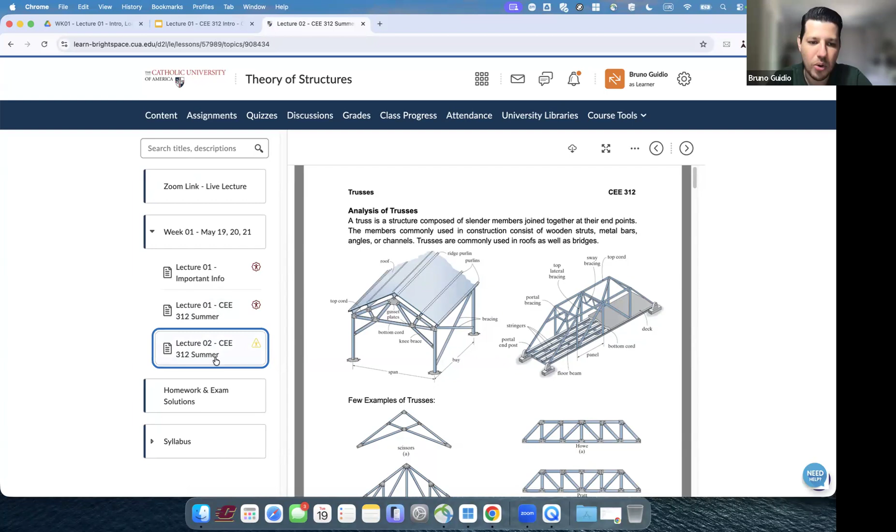Week one, lecture one—that's what I'll spend time on, and that's what I'm about to start now. I've already posted lecture two, which will be on trusses for tomorrow, if you have time. Lecture three will probably be SAP2000, so that's going to be software—I don't have anything prepared, I'll just go into the software and maybe create a problem and post it later. Here you'll also find the homeworks and the exam.

If you need it, the Zoom link is always here for you, and the syllabus is here too. If I need to update anything, it'll be posted there.

Before going to the syllabus—assignments, okay, I already posted assignment one right here, you should be able to visualize it. Grades—you can see your grades there, and that's also where exams and quizzes will be listed. I'll probably make a fake quiz so you know what I mean about quizzes. Discussions—feel free to post anything you'd like to discuss or anything interesting for us to see. And grades, that's pretty much it.

Let me go to content and to the syllabus. Okay, theory of structures—what are we going to learn in this class? We're going to learn principles and methods to analyze structures. In other institutions, this class is called structural analysis, so we're going to analyze structures.

We did something similar, or very similar, in statics, where we analyzed trusses, beams, and shear-moment diagrams. We're going to do this here as well, so sometimes it'll feel the same, but it is not—we're going to go further. We'll analyze beams and trusses, but also frames, which is something we didn't cover in statics.

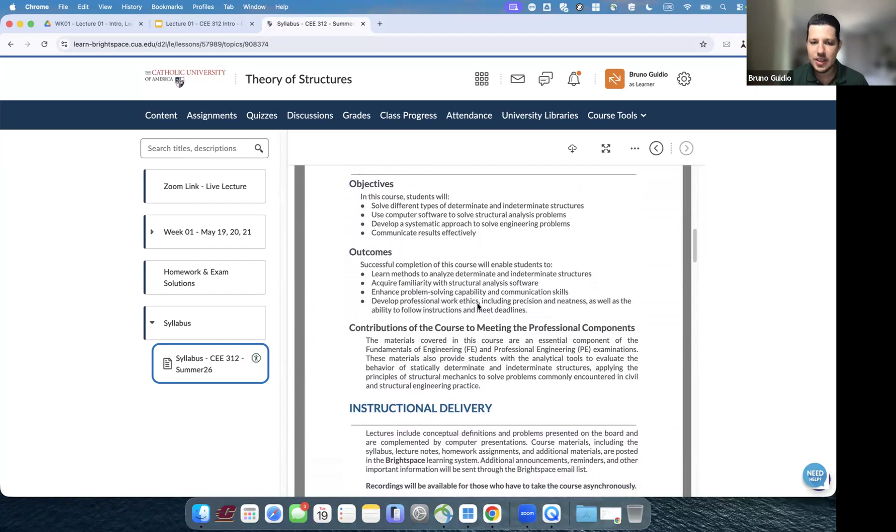Books, structural analysis, as I said. Calculator, by now everybody has one, you're going to use it a lot. Okay, SAP 2000.

How are we going to access it? First, if the syllabus is open, click here, leave it open if possible. First, the remote access request form, click here, you'll see this email, just record and submit, that's it.

Then the tech service will allow you to access SAP 2000. If you're on a computer right now, please go ahead and do it.

Later, you're going to follow these steps. You have to go to vpn.cua.edu, come here, probably student login, get your ID here.

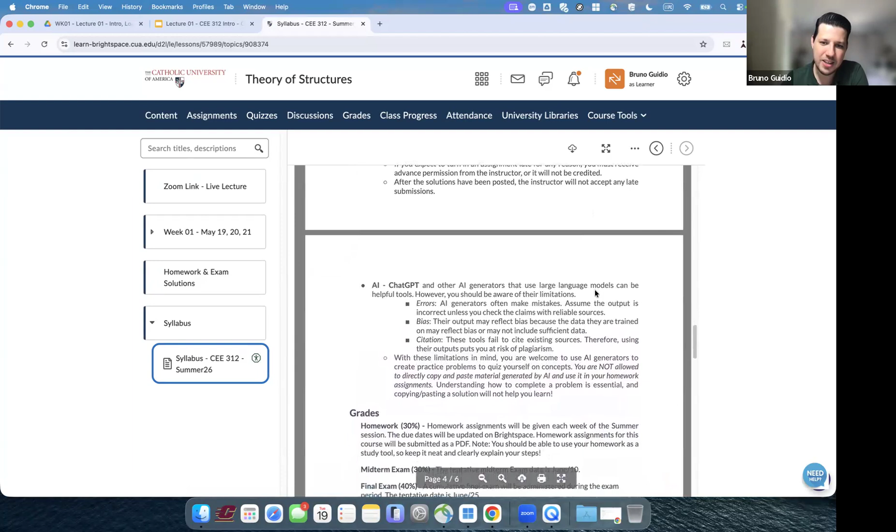AI, guys, I already told you about AI, use it in your favor, I'm not against it, use it to create new problems. But pay attention to whatever it gives you, let's see if AI can solve the homework.

Yeah, probably AI can do a decent job, but you have to know the stuff in order to find if the AI is doing a good job or not.

Engineers are using AI, but we still need engineers to review plans, to review drawings, to review assumptions. We still need your critical thinking, so you need to be able to read it and see if there are errors or not. Please, if you're using AI, make sure you review it and understand it.

Sometimes you're going to ask AI to create a problem for a topic, and maybe AI is going to get something wrong in the statement, and you're going to be able to judge it. That's what I want to see, just seeing if it is all good with AI.

I didn't do it this time, but probably I'm going to do it for next fall. Last fall I took a statics problem and put it in different AIs, and I got three different answers, none of them 100% correct. Of course, this was a year ago. AI is much better right now, and every single day it's much better.

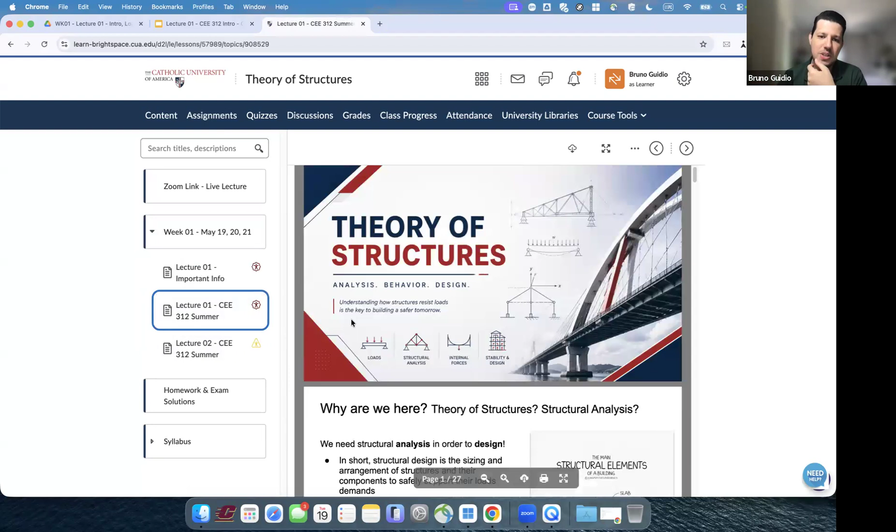Okay, let me share my screen once again, and this time I'll use my iPad. I didn't mention it, but I think most of you know already: for example, lecture number one is already here as a presentation, but I'm going to use my iPad to make some notations. But for lecture two, that's pretty much what I'm going to do most of the time—we have the lecture, we have a space to solve problems, I'm going to use the iPad, and then after class I'm going to post the completed PDF for you as well. So for those who never took my class before.

So those are the things I'm going to start discussing and keep in mind for the structures - that's what we're gonna do in this class. So why are we here? Theory of structure, structure analysis - we need structure analysis in order to design.

In short, structure designing is the sizing and arrangement of structures and the components to safely support the loads. This is design - we're gonna size and arrange the components of the building. What are those components? Well, we have slab, right here, columns, we have beams, we have foundations. It's pretty much what we have, and we have how we size these, how we arrange those structures.

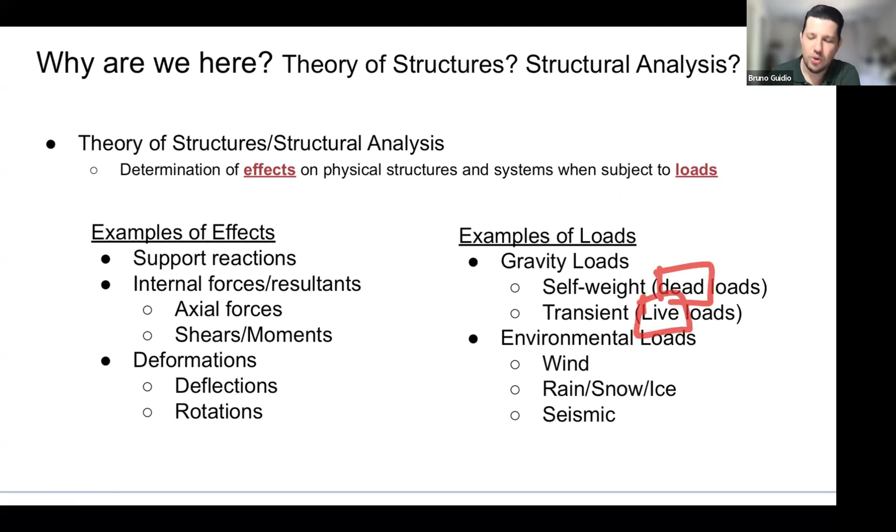And what type of loads do we have to cause those effects? We have some examples here - gravity loads, which is dead loads and live loads. Dead loads are the self weight of the structure - all these stones, concrete, the steel, this glass, the window glass, the roof - all of that load.

And what are the live loads? Well, live loads - people. What else? Chairs, tables, computers - live loads, things that can move. We design or analyze the structure by considering some dead load and live load - how many people are going to be here in a space?

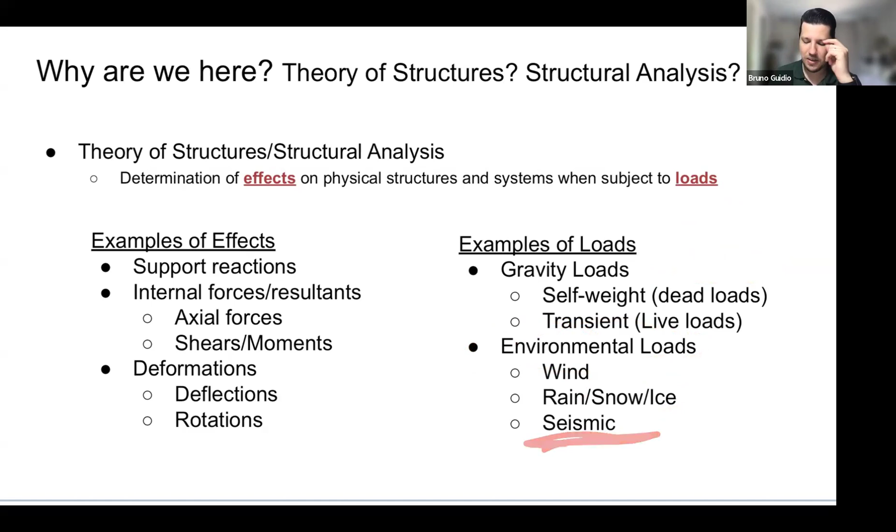But also we have environmental loads, which is wind, rain, snow, ice, seismic. We don't have seismic that much, though people say a few years ago we had seismic here in DC, but we have wind, rain, snow. So in order to design this column here, we need to determine how much snow is going to be here.

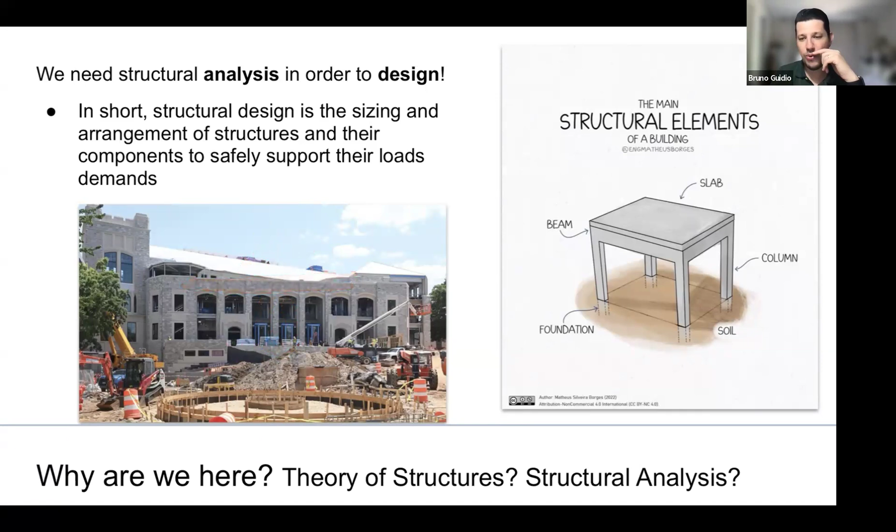How about the rain load? And we have snow, but sometimes we just have some ice there. Ice is going to stay there for a few weeks. And all of those loads are going to cause reactions, internal force, deflections.

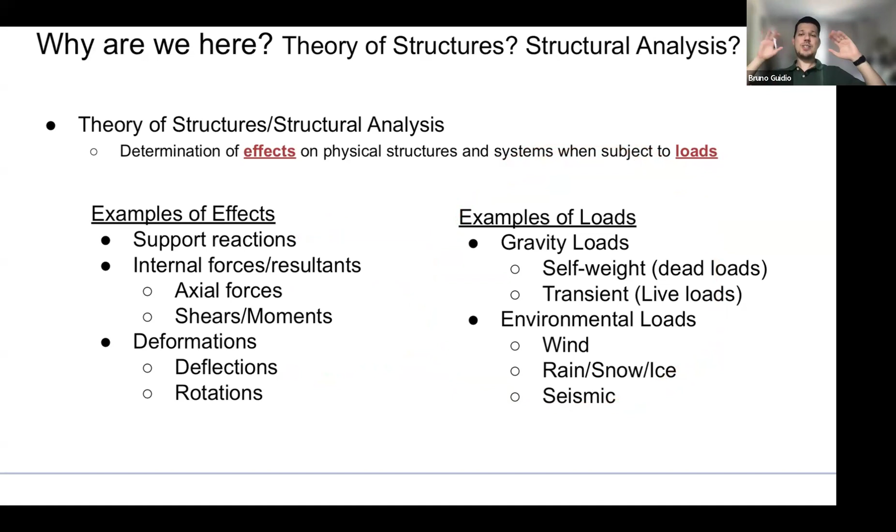So see how the structures behave - that's what I want you to see in this class, how they are behaving. Let's take a look here. Structure loads, as I said, we have all of those - various loads imposed on the structure. So the first thing that we need to understand, load is very important, very important.

You can get a post-it and say study about load path. Load path, this is huge. We need to visualize how loads are transmitted between and among the structure. It helps engineers sometimes eliminate unnecessary members, strengthen others, or identify potential problems. So once we understand how the load path goes in our structure, we start to understand how we design the structures.

We start understanding, hey, is this column here really necessary? Can I remove this column and distribute this load to other elements, and how is this going to be? Maybe someday your job is going to be the following: the client calls you and says, hey, I bought this house, but there's this column in the garage, and I really want to remove it because I want to fit another car. Am I losing this space because there's a column right there? And what do you do?

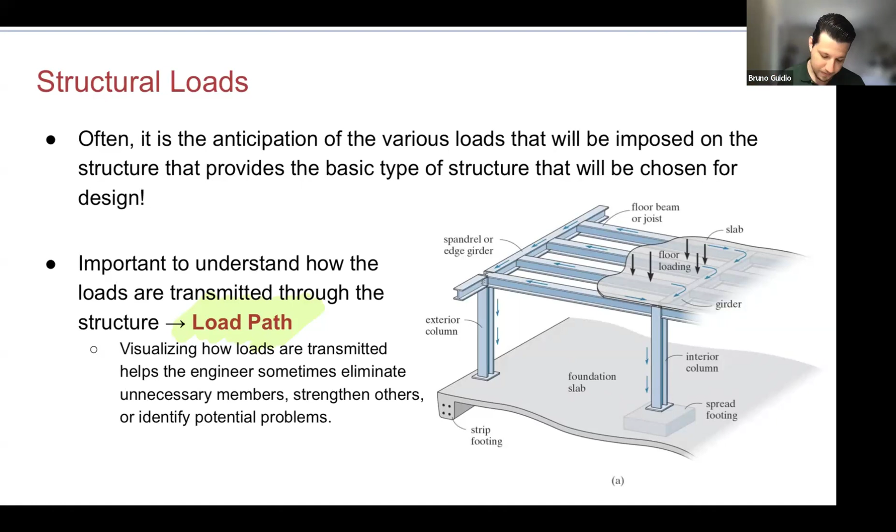Okay, so this is what I want you guys to start visualizing. This is very important, especially if you are going to do a structures concentration. But of course, everybody needs to have this understanding whether you're in structures or not, so that's why it's a required class for everybody. Now, we talked a little bit about structure loads - sorry, the load path.

Now, Bruno, how do we know the loads that are going to be applied in this structure? Well, remember that I talked about self-weight - I'm going to get there. We can calculate self-weight, we have the cross-section of a concrete beam, you know the specific weight of concrete, we can get there. But what about the other loads? Okay, we have some building codes, some design codes to guide us about the loads in structures.

For example, one big one is this: the minimum design loads for buildings and other structures. This is from the ASCE - ASCE 7. So this is a document, ASCE 7, the minimum design loads for buildings and other structures. This document talks about all the loads, even the self-weight loads, the dead loads, but it's going to give you the values for live loads, because if you're talking about a house, the amount of people in the house is different than in a classroom. Do you guys agree? So the live loads that I'm going to consider are different.

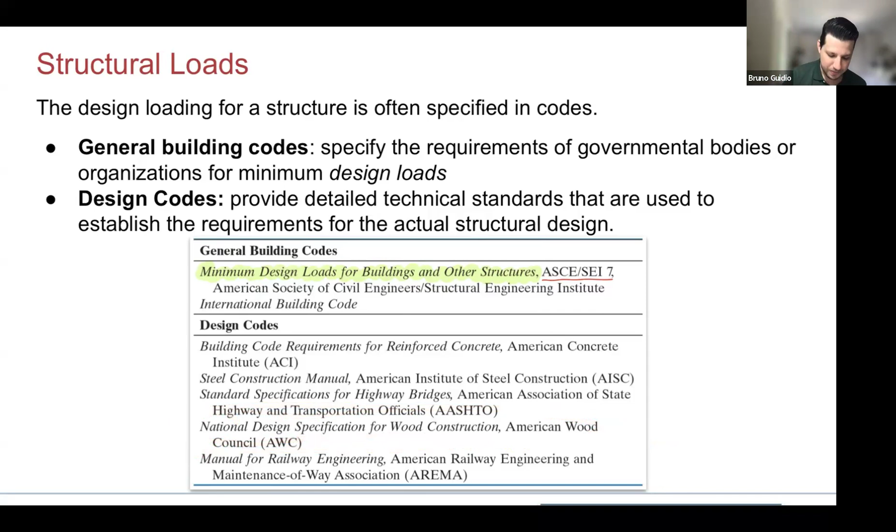Now let's talk a little about each of those loads. As I said, here I'm just going to touch on them briefly. In the homework you have a question regarding loads as well, but I go much deeper in my structural loads class next spring. Still, this is good understanding everyone should have, which is why I'm touching on it here.

Dead load: most of the time we have the specific weight for the materials. The dead loads are the weight of the many structural members that are permanently attached to the structure. For a building, that includes the weight of columns, beams, girders, floor slabs, roofing, walls, windows, plumbing, electrical fixtures, and any other attachments—all of that goes to dead loads.

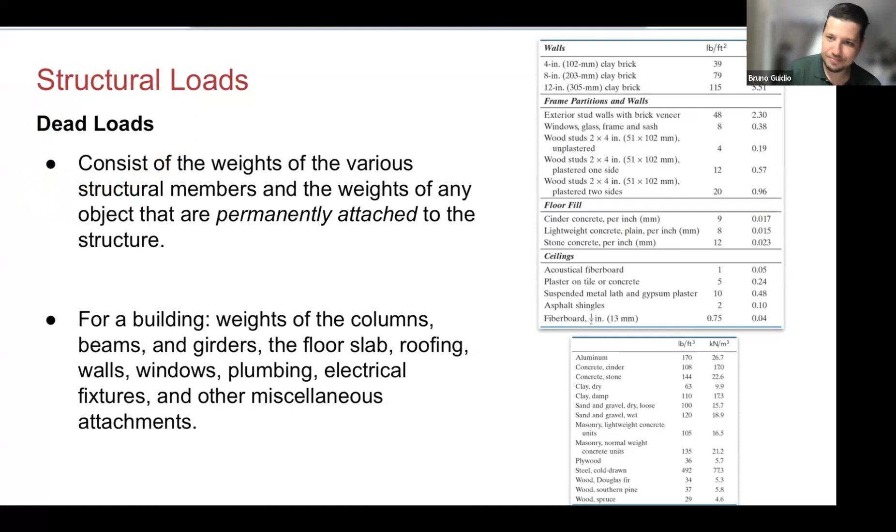So for example, right here, can I zoom here? I can zoom here, you guys can see.

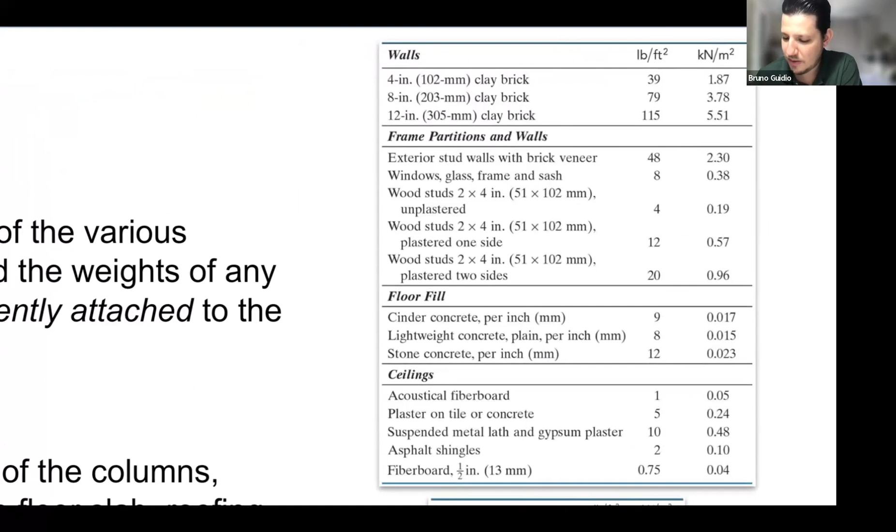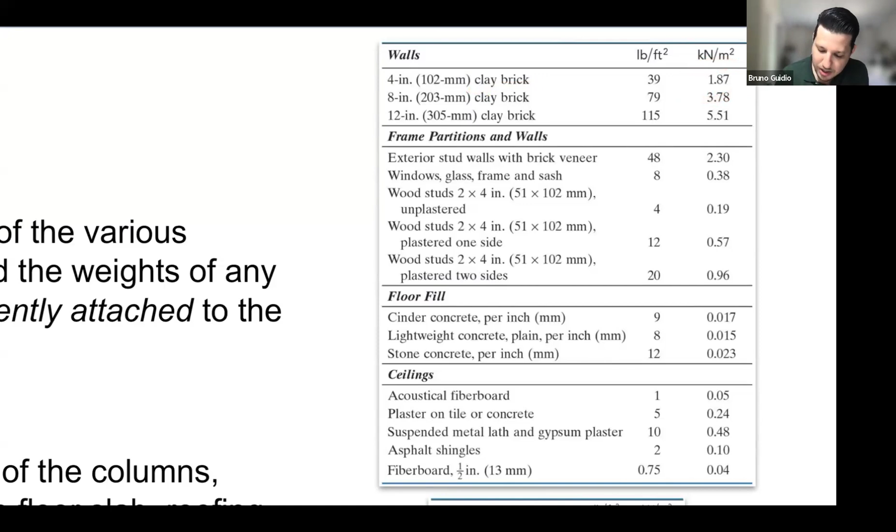Walls. What is the specific weight for a 4-inch clay brick? If the wall is 4-inch, the width of the wall, I have 1.87 kilonewton per square meter. How many square meters of wall do I have? Multiply, I have the weight in kilonewtons.

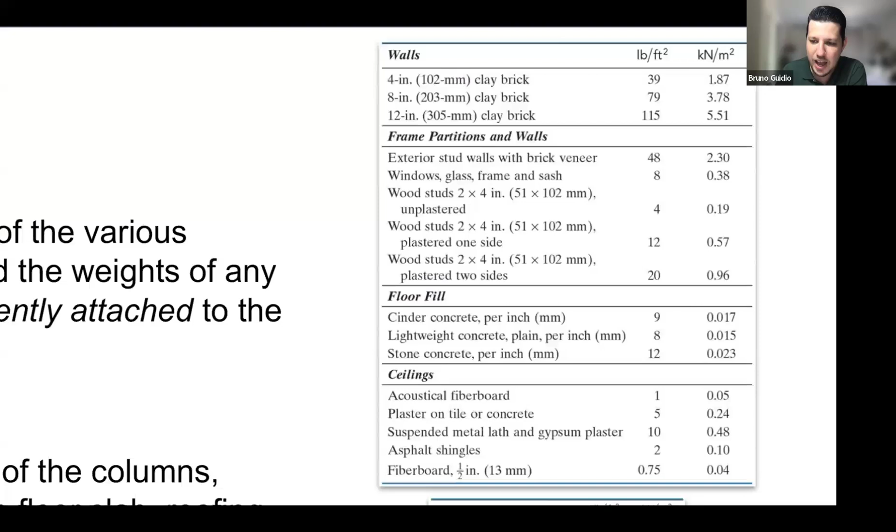Or pounds. Let's talk about pounds for 12-inch clay brick, 115 pounds per square foot. How many square foot of wall do I have in that specific area? 25. So 25 times 115 is going to give me a number of pounds. That's going to be the weight of the wall.

And that wall framing, remember using framing, I'm using 2x4s, with plaster on two sides, unplastered, just the 2x4. I have windows, exterior stud walls with brick veneer. Most of the time we have specific weights.

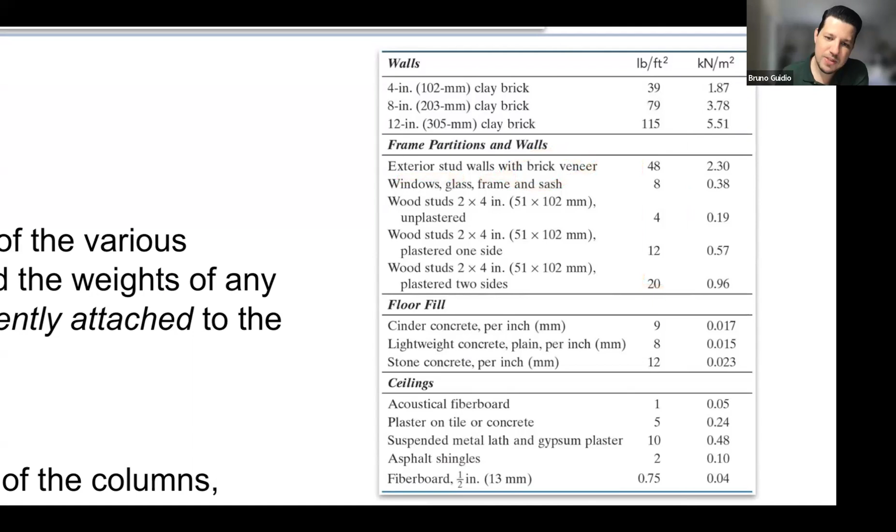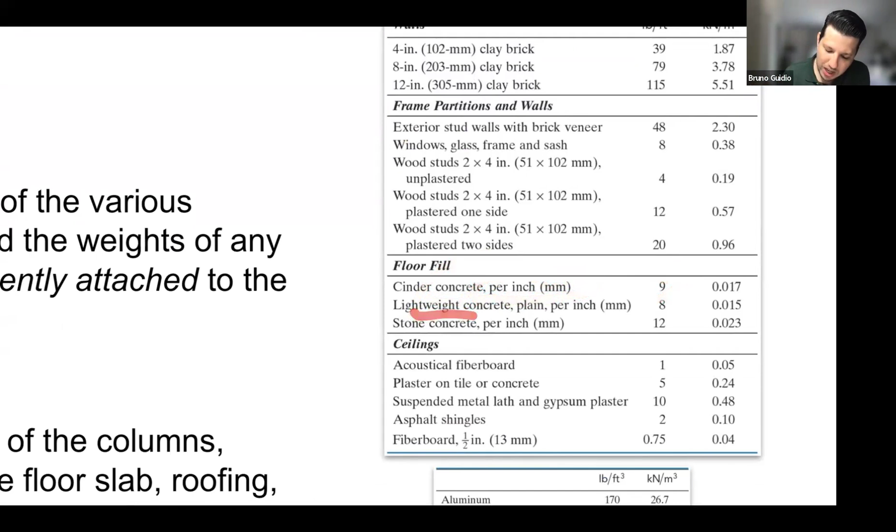The floor fill, concrete per millimeter or per inch of weight of height of concrete. We have 9 pounds, lightweight concrete, stone concrete, ceilings. What am I gonna put in the ceilings? Right here I have specific weight. Also, I'm gonna give an example in a moment.

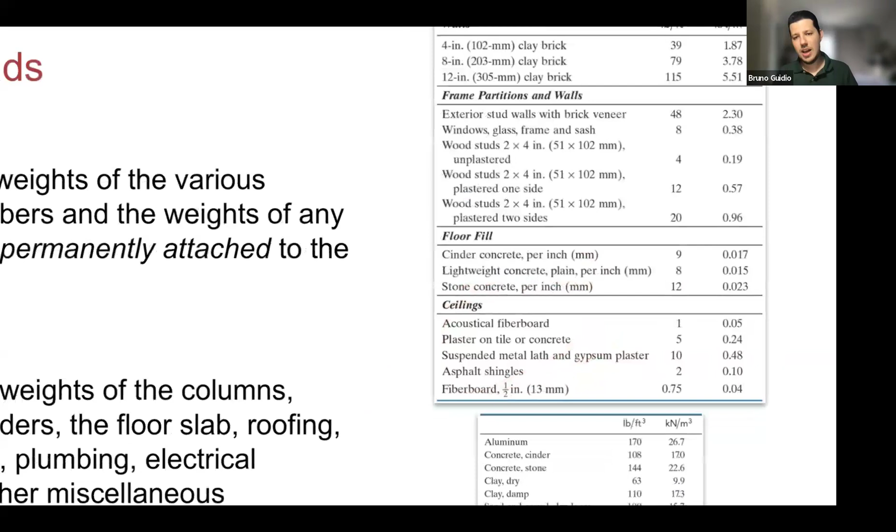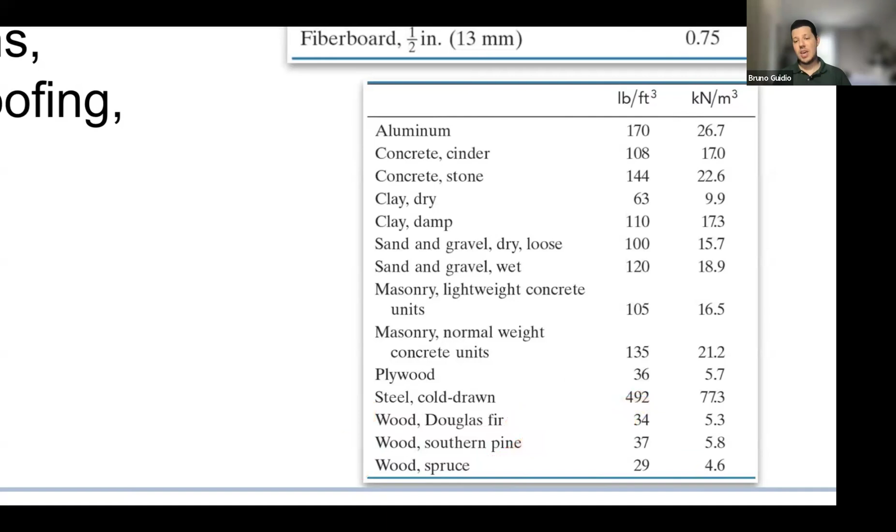We also have here for some materials: aluminum, concrete, clay, sand, masonry, plywood. If you're talking about steel, wood, we have different types or species of wood: Douglas fir, southern pine, and spruce. Different weights. With wood, in my design with you, which species of wood am I gonna specify, because there are different weights, different considerations.

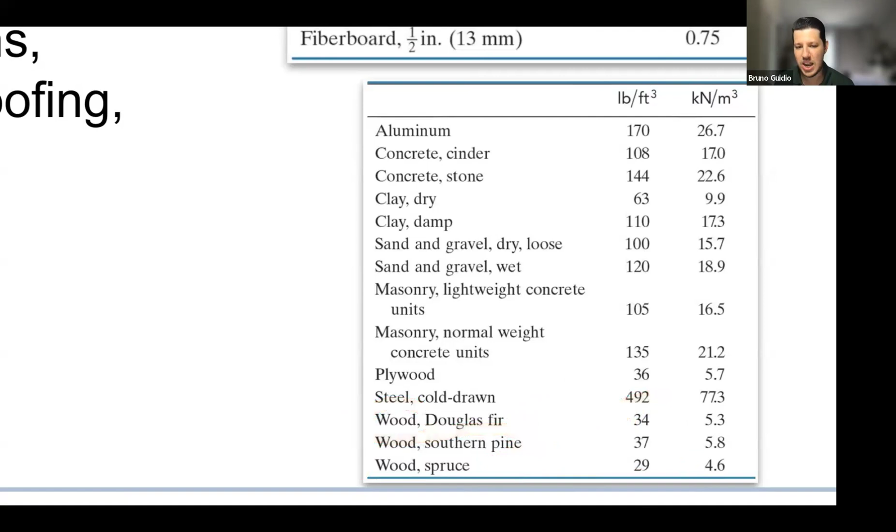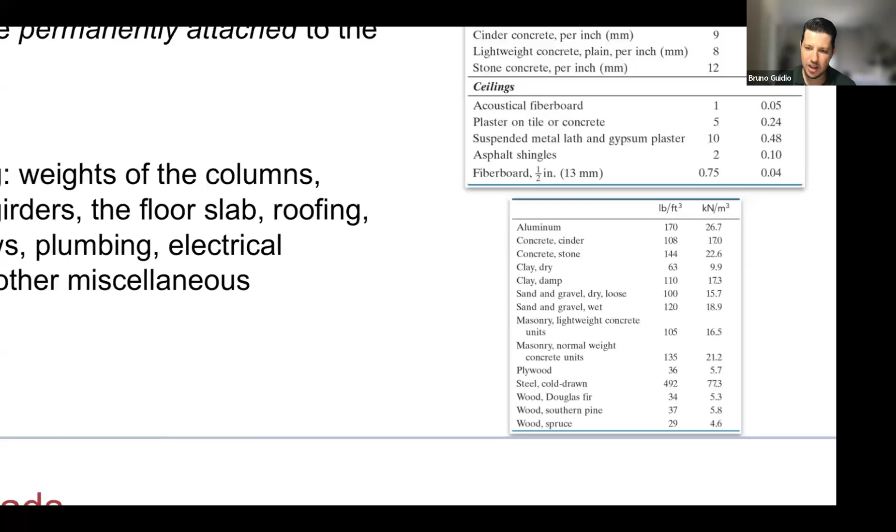Depending where you are in the United States, you're gonna find some of them. Most of them you're gonna find Douglas fir, but if you go to the south, you're gonna find southern pine. So those are the dead loads.

Let me give an example. Did I solve this one here? Yeah, I solved it already, so I don't need to solve it right now. So dead loads, example.

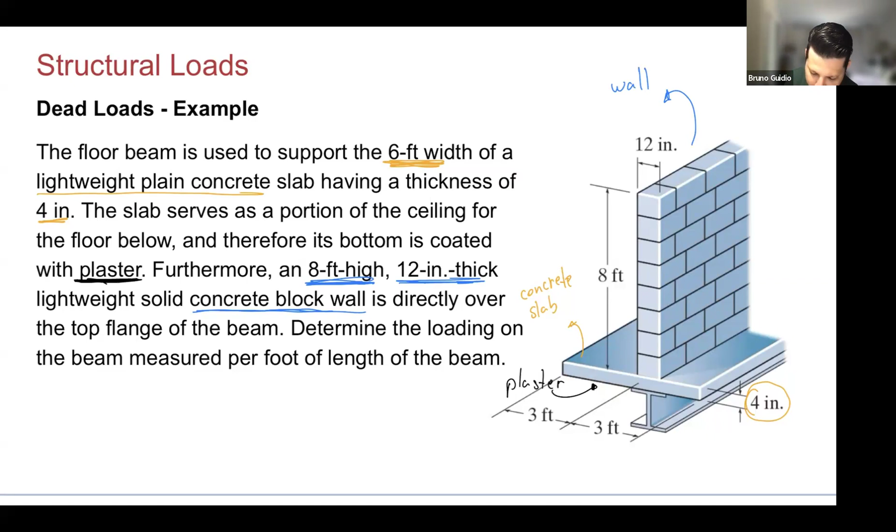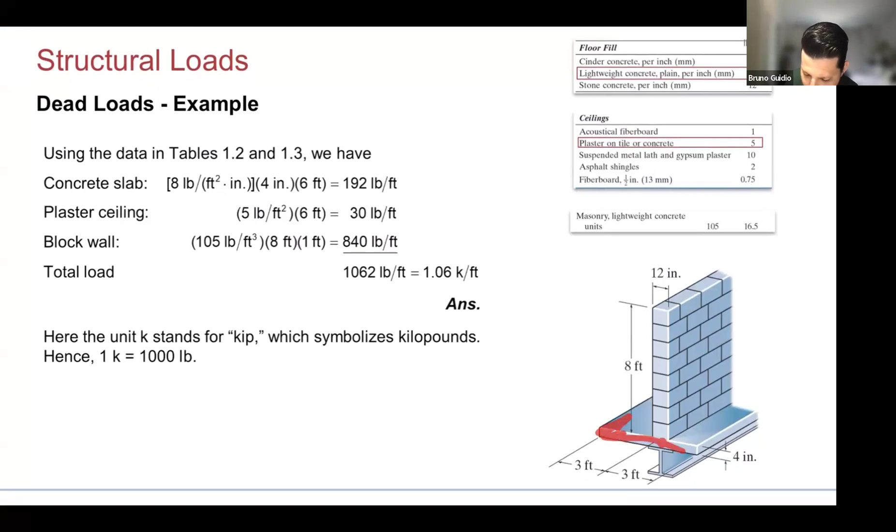So how do I do that? Using those tables that I showed, as I said, this is a very high-paced class, so I'm gonna just go straight to the point here. First of all, what do we have here? We talk about the concrete slab. I go there in the table that I showed you for floor fill.

I have lightweight concrete, 8 pounds per square foot per inch. I have 4 inches and I have 6 foot of length here. Multiply all of that, I will have 192 pounds per foot.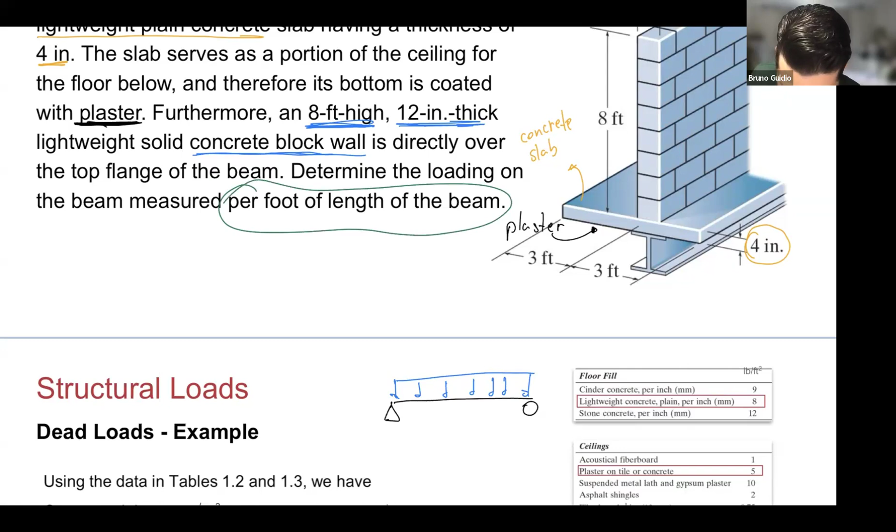Because we're talking about beams, we're talking about the distributed load. That's what I mean by measure per foot of length, it's a distributed load right here. So that's why I'm getting 192 pounds per foot. Per foot of this beam, I have 192 pounds.

Now, plaster as well, ceiling, I go there, found here, 5 pounds per square foot. I have 6 foot, 30 pounds per foot. Wall, right here, masonry is 105. 105 times 8 times 1 foot, because 12 inches is 1 foot, I have 840 pounds per foot.

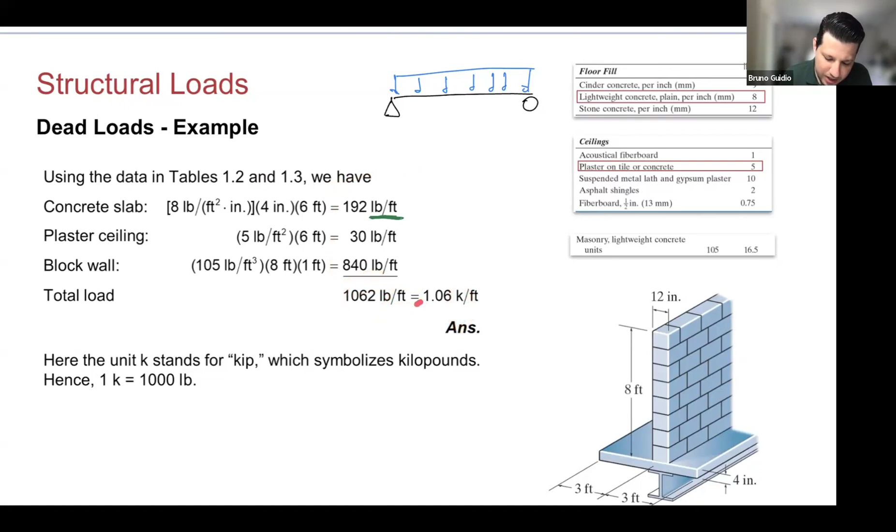Sum all of them, what am I gonna get? 1,062 pounds per foot. Remember from statics, 1,000 pounds is 1 kip. So putting here, I have 1.06 kip per foot. So what I have here is this configuration.

What do I do next? Very simple: simply supported beam, find the reactions. Then I'm gonna go for the columns and keep going.

Any questions? I know it's a little bit faster. But just going to the table, we're talking about beams. So I need the load by foot, distribute load. And then I start doing my multiplication right here. Sounds good?

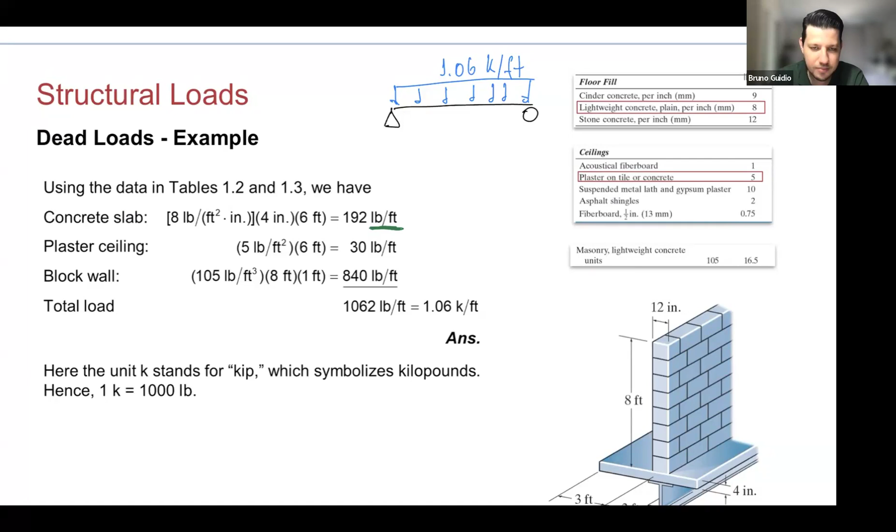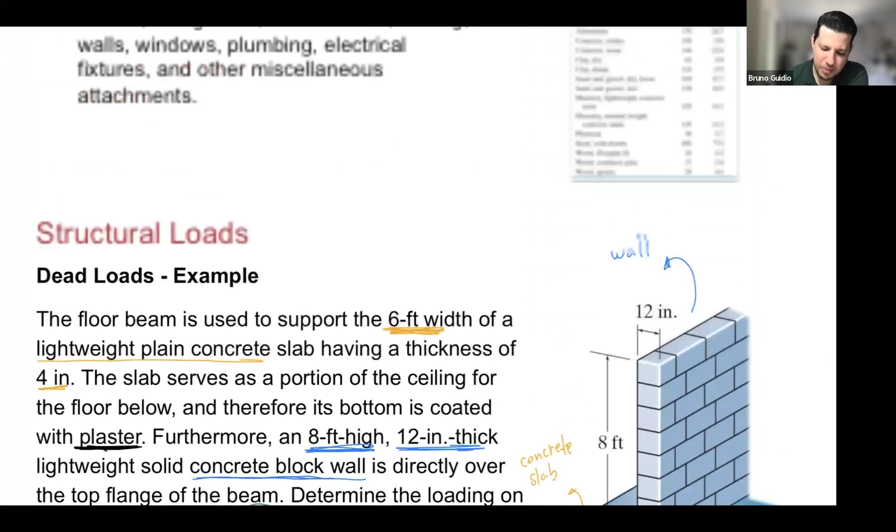So I have one problem like this one here, and you're going to use the same tables in the homework. So probably after class you can already come here and check it out, try to solve it. Let me know if you have any questions tomorrow.

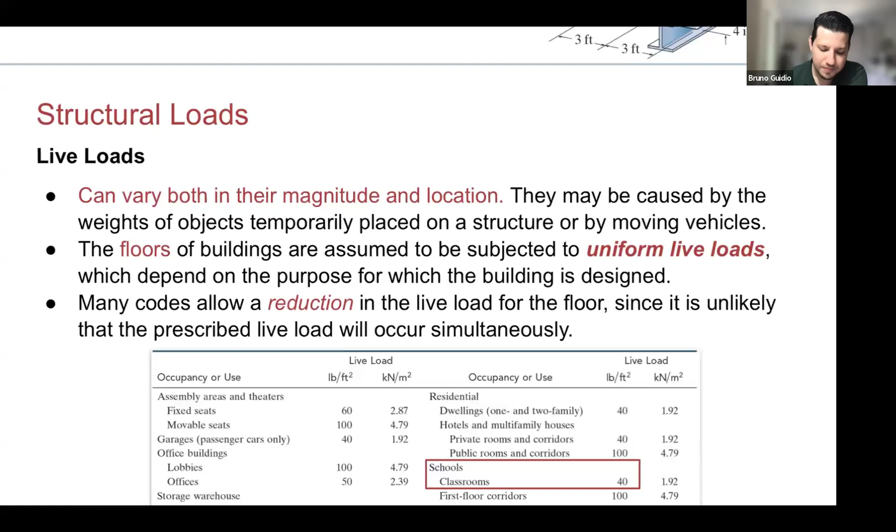Live loads. Live loads, as I said, can vary both in magnitude and location. They may be caused by weight of objects that we put there just for some short period, or by moving vehicles.

The floors of buildings are assumed to be subject to uniform live loads. So even though we have the floor of the building, and maybe some part of that classroom is the professor, is the students, and the other part, we consider the whole floor as a uniform live load, meaning for every point of that floor, we're going to put the same load. This maybe is not the reality, but we are just playing safe.

So for example, for classrooms, as you can see here at the bottom, the live load is 40 pounds per square foot. So when we design the slab, each square foot of that slab we're going to add 40 pounds. And depending on where we are, we have different values.

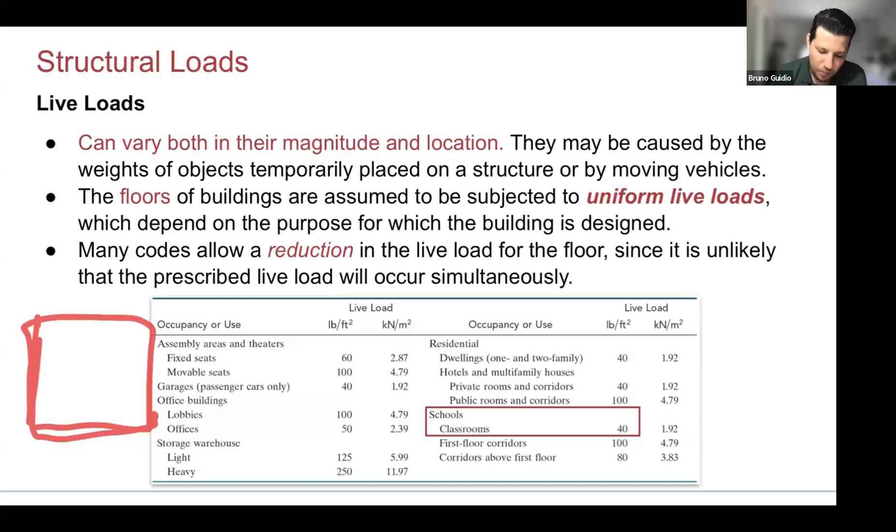And then if you take a look, 40—take a square here, 1 foot by 1 foot, so we have 1 foot square, and try to simulate like 40 pounds per foot square. That's a lot of people, so many people, so we're already playing very safe.

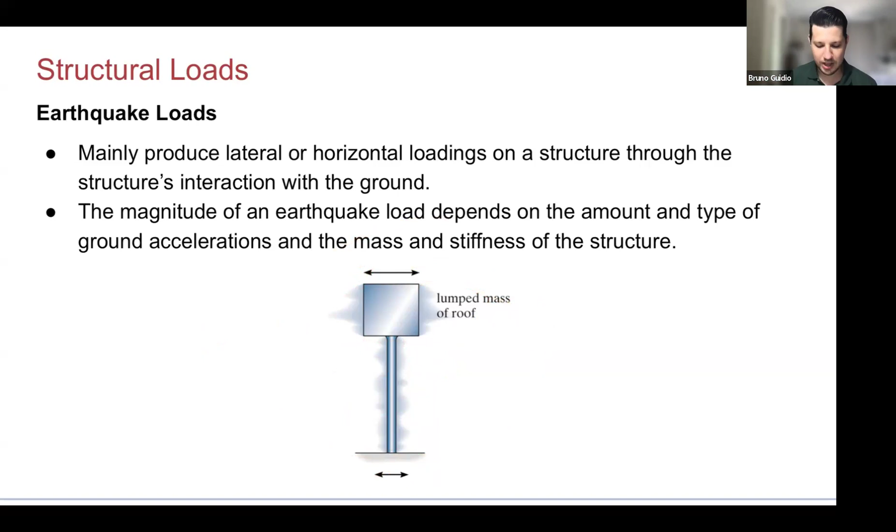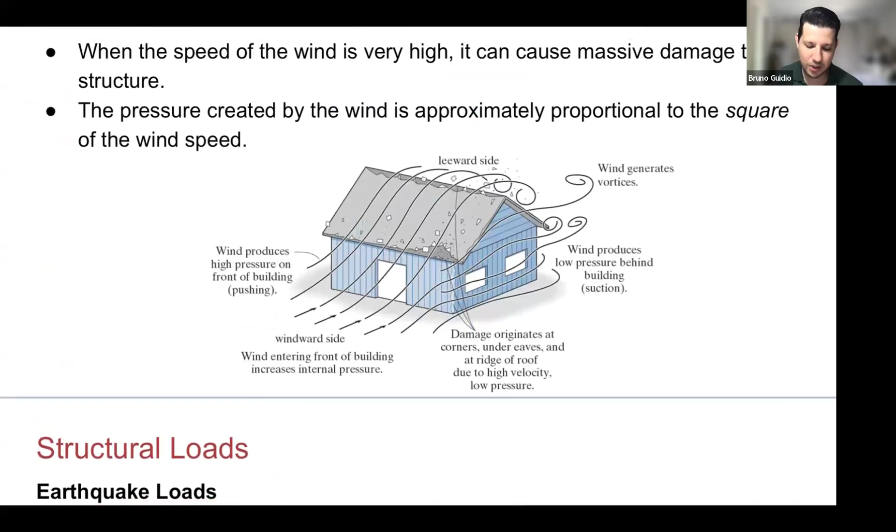We also have earthquake loads. Earthquakes, as you know, just moving—it's kind of this lumped mass, going to the left, to the right, to the left, to the right, moving the structures, depending on the magnitude of the earthquake. So we have to design for those seismic loads as well. The wind loads and the earthquake loads are specific loads that we design for in lateral systems.

Okay, lateral systems. I'm going to tell you about them in a moment, because those lateral systems are going to be able to get that kind of load and distribute it to the other elements.

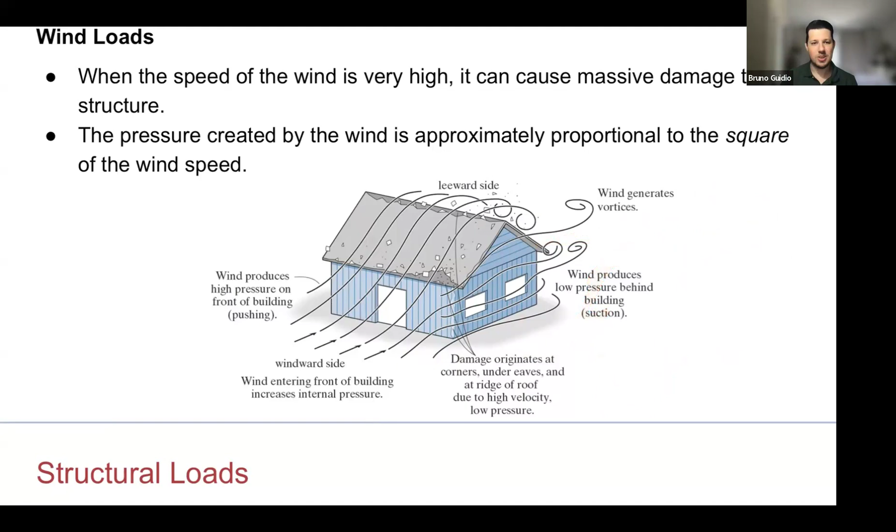So, for example, the columns are mostly gravitational. They receive the gravity loads, the live loads, and the dead loads. But we need some elements in order to get the lateral loads and move these lateral loads to the columns. So these lateral loads are going to be held by the lateral systems, and the lateral systems are going to help the load follow the path to the columns, to the beams, to the floors. So we need lateral systems. I'm going to tell you in a moment.

Just to finish talking about loads, and for you to know about it, we have some load combinations. Once we calculate the dead load, live load, rain load, snow load, all of that, we need to combine them. In order to combine them, we have two methods: the ASD and the LRFD.

Today, most designs are done in LRFD, meaning that we have the safety factors already in the design. You're going to learn, when you design, you have a lot of safety factor, and I think for mechanics of solids Dr. Solaris touched on safety factors a little bit. This means we reduce the strength of the materials, the strength of the beams, the strength of the columns, and we assume they are a little bit weaker than they are.

However, in the LRFD, we also do another thing: we decrease the strength of the materials, but we also increase the loads. So we are safe in two places. We increase the loads by a factor, meaning this is the load that I calculate, but now I'm going to design for more load than that, so it's not going to be able to fail.

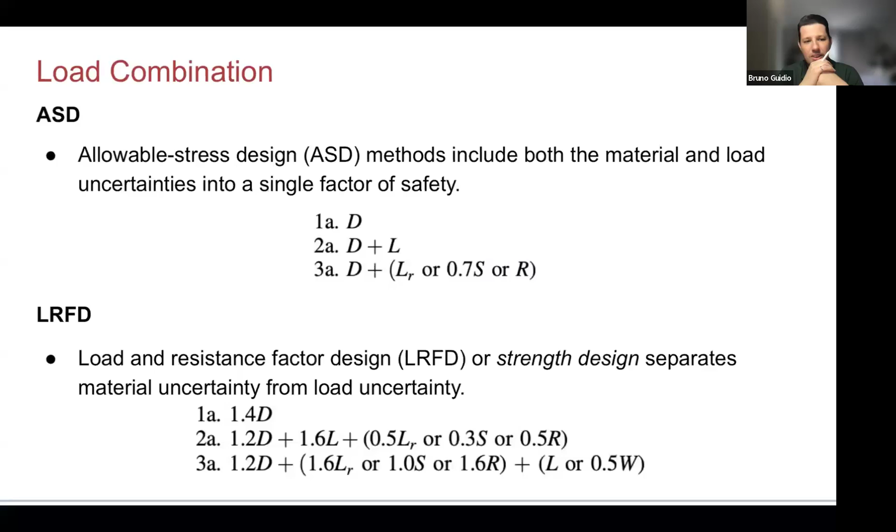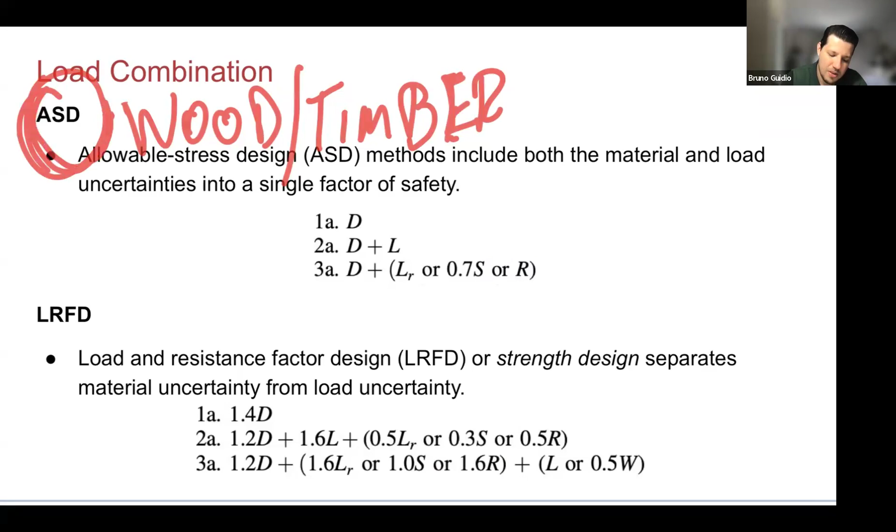Just touching on this for concrete and steel: LRFD is what we have been using. All the codes are updated for it. If you go to a construction site, that's it. However, for wood, which is timber, most codes and most companies are still using ASD. If you take my class next fall, timber design, we're going to use ASD because that's what they have been using for load combinations.

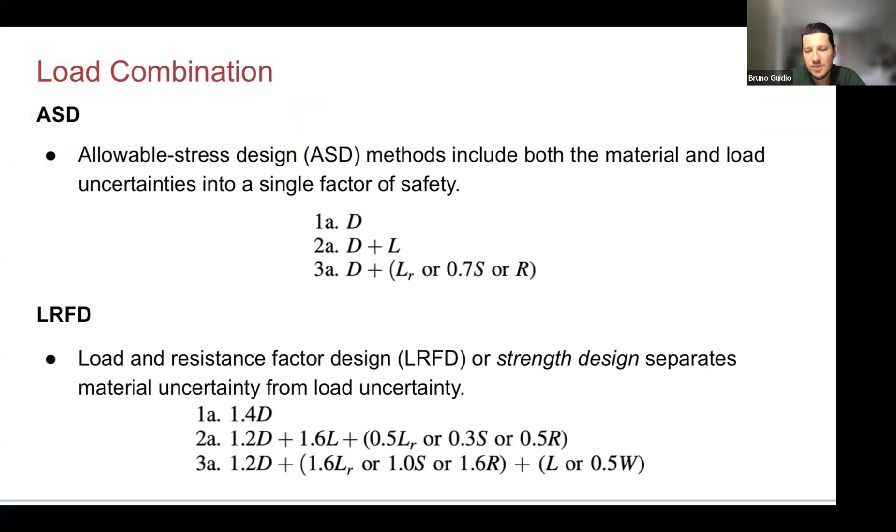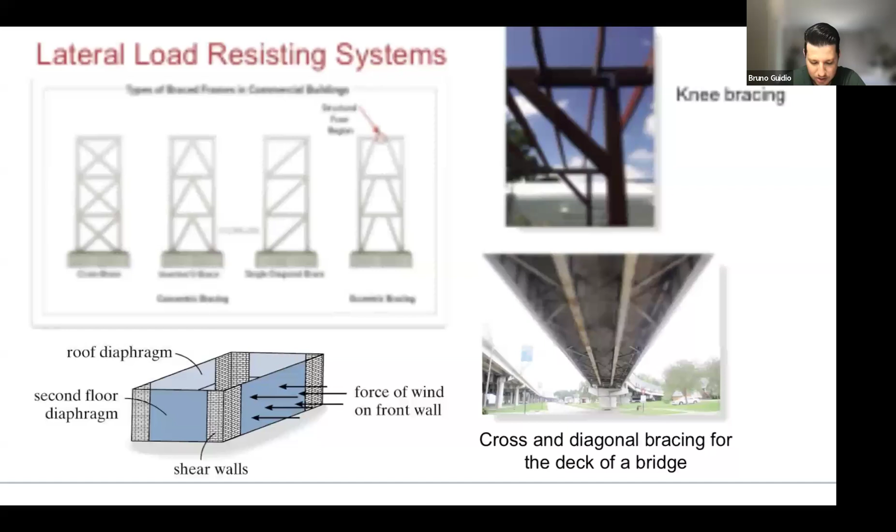Let me just talk about lateral systems, and that's it for today. As I said, lateral load resistance systems, or LLRS, resist lateral loads like wind and earthquake. As you can see here, we have the wind striking and racking the building, moving the building, and we have this effect.

To resist it, engineers will use bracing systems, most of the time the bracings that we know as bracing, as you can see here. Those bracings are there. Sometimes you go and see, wow, what is this, this kind of X shape between this wall. Sometimes the architect gets mad because they have to use bracing and can't put the window there anymore.

Why do we have those things over there? Well, because those are the ones that are going to resist the wind and earthquakes.

Let's say we have the wind here. Once we have the wind, this is going to go all the way to here. This guy is going to be in tension, and it's going to resist to keep those structures together.

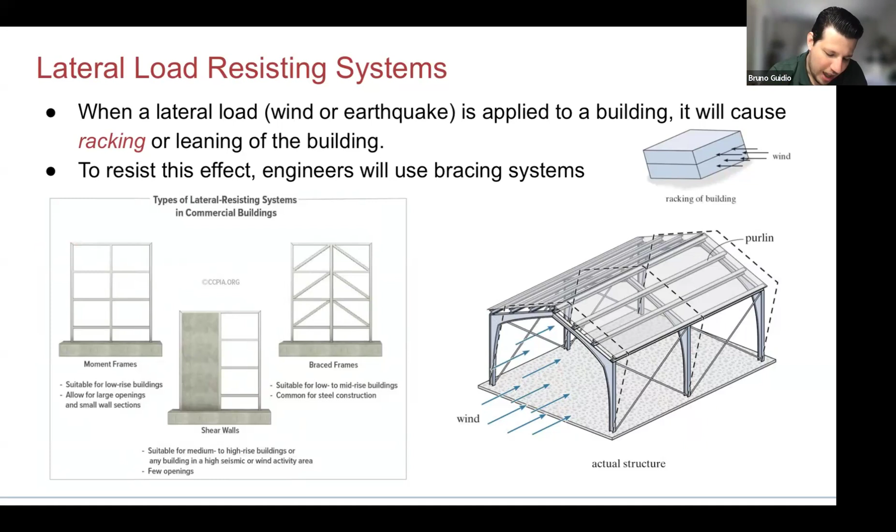Plus, we have moment frames. What is a moment frame? This is mostly used in concrete design, where we concrete the beam together with the columns, so the connection is such that if one moves, the other one moves too. They are moment connections. The moment that we have here, we're going to have here as well, it's just going to transmit to the others.

So we have different types of lateral resistance systems in buildings. Here's a different resistance system as well: once again, cross braced, inverted V brace, single diagonal bracing, eccentric bracing, where we can have windows here.

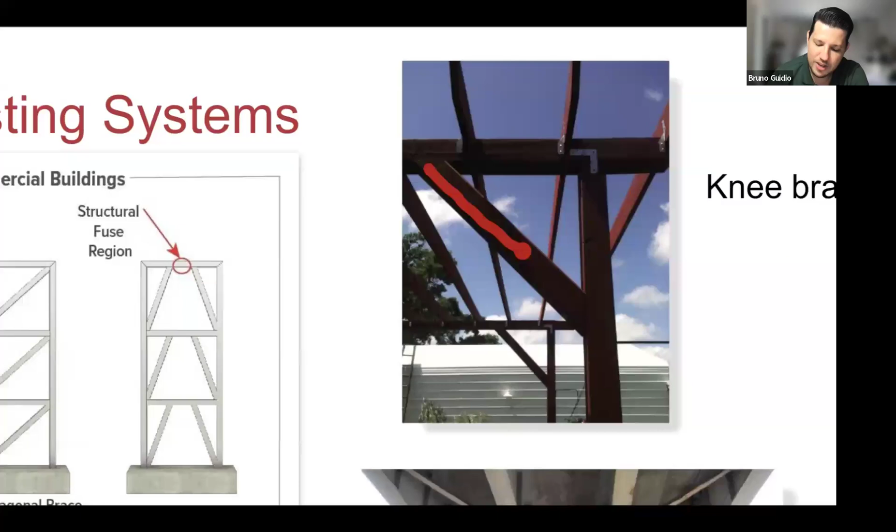This is common as well for steel frames, where we have the connection, but this connection is not a moment frame. So we're going to have this knee bracing here. It's going to help us with the lateral loads.

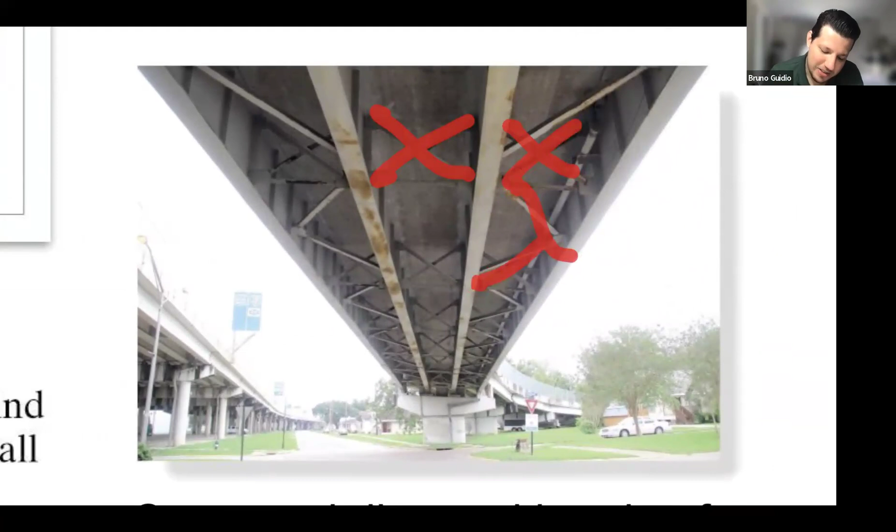Next time you pass below a bridge, you're on the highway, the 95, or at Seaway, leaving the metro station, look up. You're going to see those bracings. Why are they there? Wind. They are there to resist the wind. Of course, they have another role, another objective why they are there, but they are also there because of the wind loads.

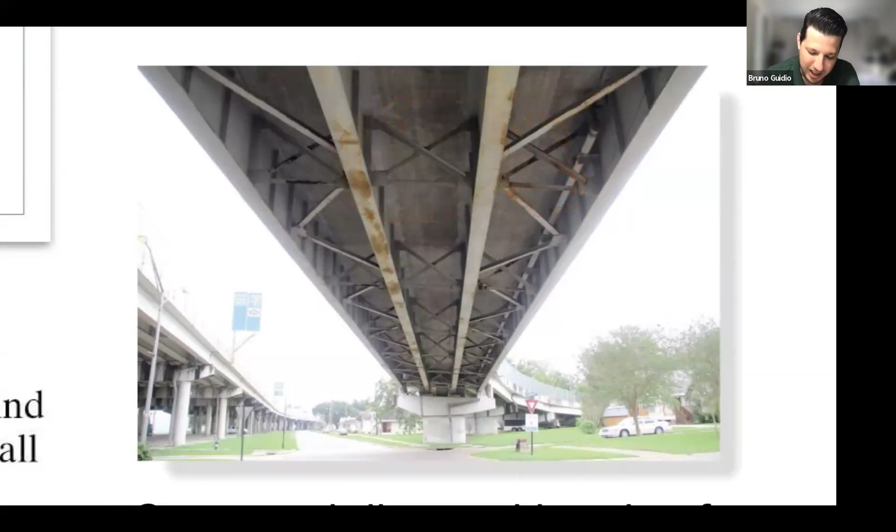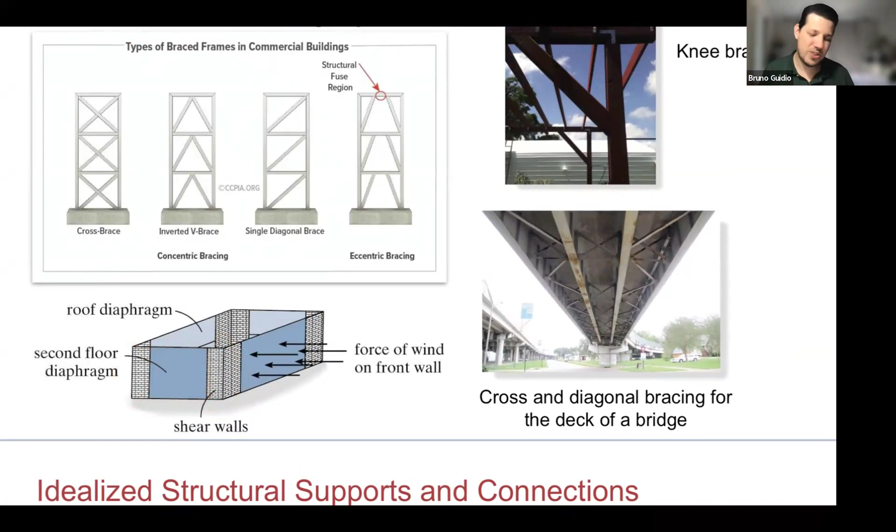Because of the lateral resistance system, when you go for steel design, you're going to understand why they are there as well. One of the reasons is wind load, earthquake loads for when we have shear walls, corners, diaphragms - like these panels for wood design, the plywoods on the floor. Most of the time they help us with the wind, distributing the loads through the other elements.

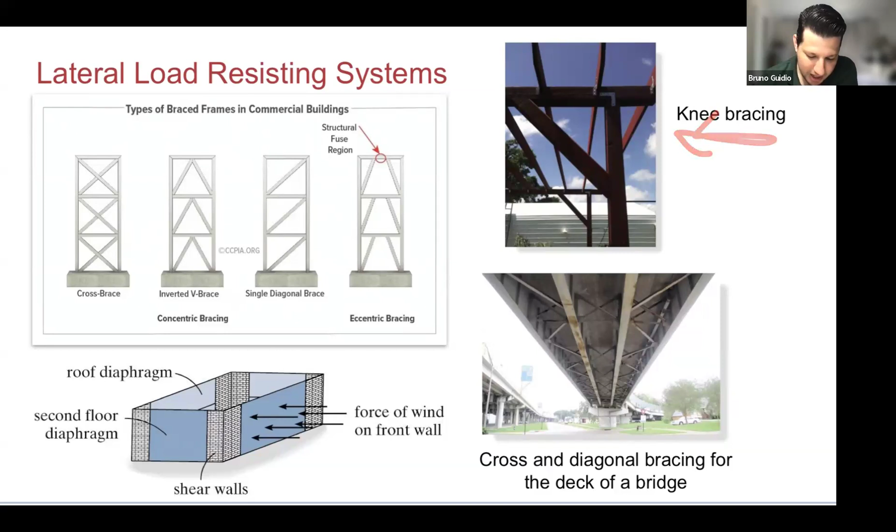So I will stop right here with the lateral resistance systems today. Tomorrow we're going to keep going with this presentation.

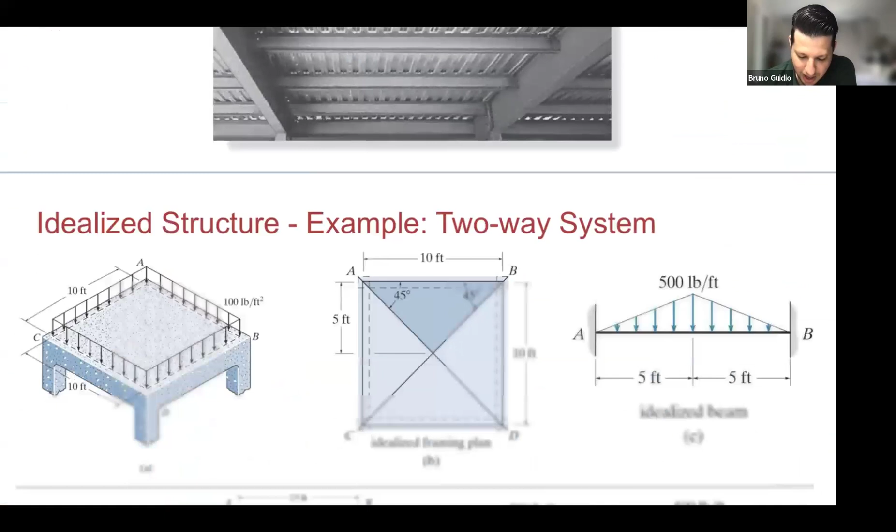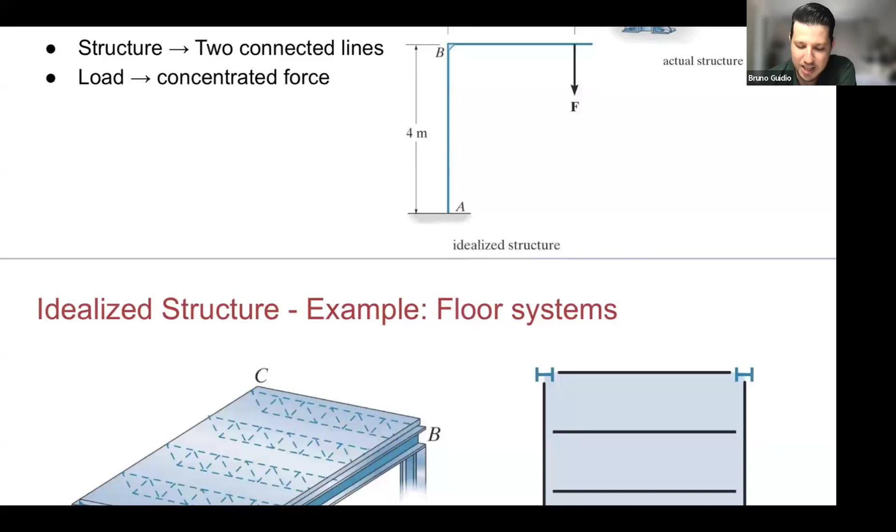Where I'm going to show you a little bit of an example of the loads, and we're going to start the truss. Then we're going to keep going until the time is done. And on Thursday, before the SAP2000, I'm going to finish the truss problems and then go right to the SAP2000. So it's going to all work out for us.